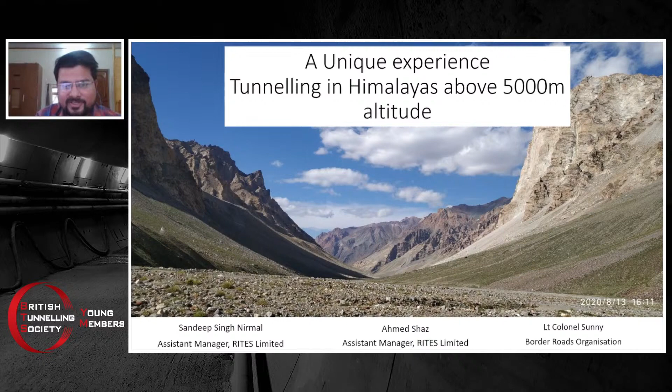Sandeep, can we move to the next slide? Sandeep, can we go to the next slide? Yeah Shaz, is this visible to you? Because we have moved to the next slide already. No, sorry, it's not visible to me. But is it from my end only, or can everybody see? Only I'm not able to see the next slide. I'll try to do that again, just give me a second. Yeah, I'll try to share it again. All right.

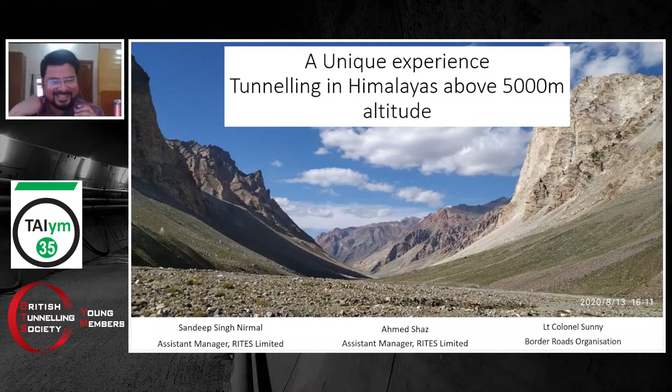Hello. Means only I have to start, or Colonel Sunny have to start again? Okay, now my voice is clear.

Hi everybody. This project, what Colonel Sunny had given a brief about before, is a 4 kilometer road project in the central Himalayas with twin tube tunnel, and there are cross passages connecting both the tubes. The altitude of the portal is around 4,800 meters, and the passes on which we were working in that area were around 5,100 to 5,300. Some of the tunnels we're working on are like the highest motorable road in the world, and we are making tunnels there. Coming back to this project, the height of the pass was 5061.

Okay, again something happened. Hello. I'm audible, but I'm not able to see the presentation. Sandeep, there's some issues from your side. Is it same for you, Divik? Let me share again.

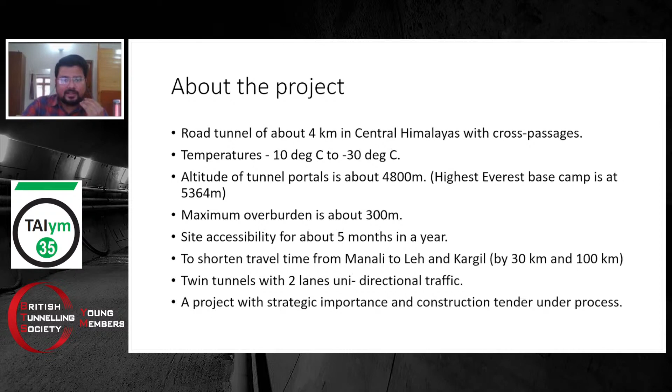300 meters, and the site accessibility is 3 to 4 months effectively. In that time you have to tackle a lot of difficulties, with frequent snowfall, rainfall, and sometimes cloudburst. The approach road leading to the tunnel site sometimes got washed away during that working period of 3.5 months, so a lot of challenges we face on a daily basis. This tunnel, once made, will shorten the distance from Manali to Leh by around 30 kilometers, and from Manali to Kargil by around 100 kilometers. It is a twin tube tunnel with unidirectional traffic. This is a project of high strategic importance, and the construction tender is under process. Can we go to the next slide?

To prepare the quality DPR, we did many pre-construction studies in the site area. These included traffic studies, and then alignment design was done. There were many options we figured out, and out of all the alignments, we selected the best possible one in that area, considering all the constraints and mandates. We procured high resolution satellite imagery, and after that topographic survey was carried out. For geological investigation, we did geological mapping. Our whole team of geologists, senior geologists, and everyone went through the alignment in the remotest possible area, even on maximum overburden, and they did a good job. After that, the boreholes were planned, and we carried out an extensive drilling program so that all the required boreholes could be completed in the limited time. We did more than sufficient drilling, working day and night in that area. Although it is very difficult to work at night, somehow we managed.

The geophysical survey was done by three methods. ERT and SRT were carried out physically on ground, and after that AEM survey was also carried out. AEM survey is basically airborne electromagnetic survey carried out through an antenna handled by a helicopter. We used a Chinook helicopter, and this antenna was taken along the alignment, and you can get as deep as 600 to 700 meters of geological data inside the ground. But the only constraint is you have to maintain the distance between the antenna and the ground at around 50 meters. If the distance between antenna and ground increases, the penetration depth will decrease accordingly.

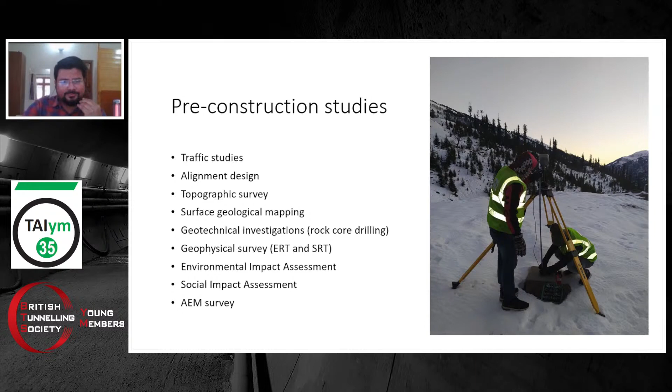Can we go to the another slide, Sandeep? After the extensive geological investigation in the area, we identified around 6 ground types consisting of quartzite, phyllitic quartzite, quartzitic phyllite, and based on these 6 ground types and considering the overburden, around 8 behavior types were concluded for the design. Correspondingly, the excavation and support classes are designed. Since it is still in tender process, I cannot go deep into the detailed aspect of each thing. This is just a broad overview of what we encountered. The L profile, as you can see in the presentation, shows some red lines. These are the shear zones encountered in the middle of the alignment, and we have proposed suitable measures that need to be taken during construction in that particular area. Can we go to the next slide?

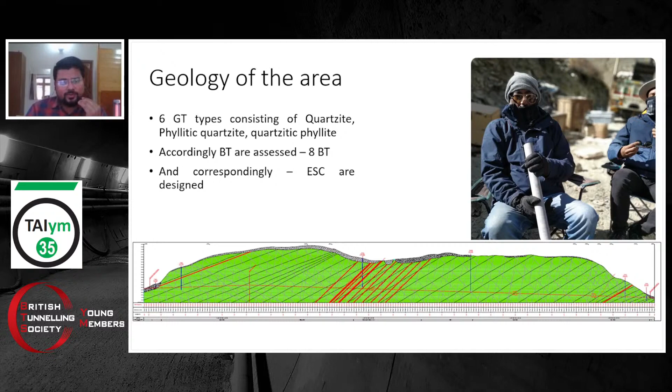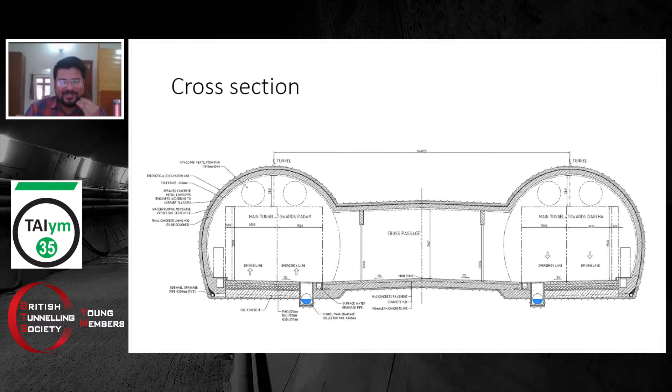So this is a cross section, a typical cross section of the twin tubes that are being connected with a cross passage. This is just a typical cross section, not much to say in this.

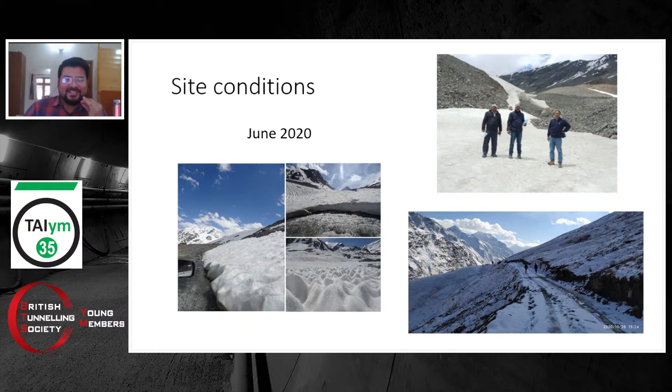It was a good experience. I'll talk down the line about the experience we had when we were there at the site for the first time. Now, working in that area for around 2.5 years, it's been almost 3 years since I was working there. Now the body is acclimatized, some better part, lot of hemoglobin.

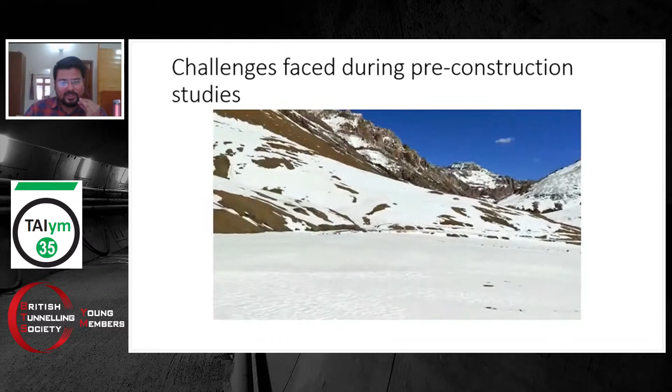Sandeep, can you just play this video? This is one of the site visits we had gone to. This is also in June, and you can imagine what type of cold and snow and difficult part of the world we are living in, we're working in. The road was not accessible, especially in that part. We had to trek to the site area just to get the location of the boreholes and portals and the alignment.

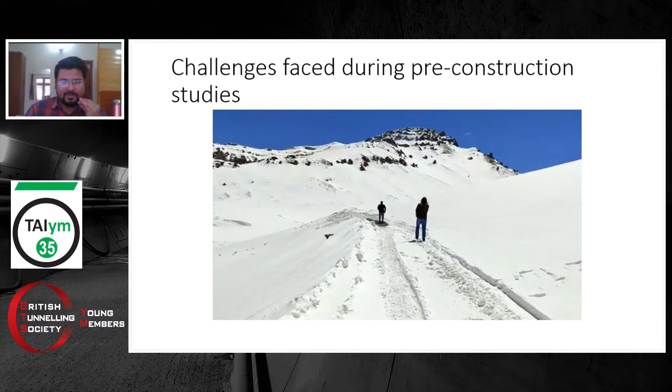So now, I just want to share some of the experiences we had faced while working in that area for more than 2 years. The working period is very limited, it is around 4 to 5 months.

Shinku La snow cover is high. In some of the other passes, snow cover is less, but temperature is very low. Winds are in biting condition, you cannot stand outside after 4:30. And since the altitude is very high, around 5,000 meters, you need to acclimatize.

The air pressure is very low in that area, so you cannot just come from the plane and stand in that area without getting acclimatized. It will just collapse you. In fact, many of our colleagues who hadn't gone through a complete acclimatization process came to the site and felt very unhealthy. We had to immediately provide them with oxygen cylinders, and some of them were immediately rushed to a safer place.

And there's frequent snowfall and rainfall. When I tell you only 4 months of working, that means the rest 8 months are totally packed. And in those 4 months also there are so many times you will face snowfall and rainfall. But since you have to complete the work, otherwise it's again after 8 months, you have to do anything to complete it, whether it's snowfall, rainfall, cloud burst, whatever. You have to just focus on the activities and how it will be completed in the limited time.

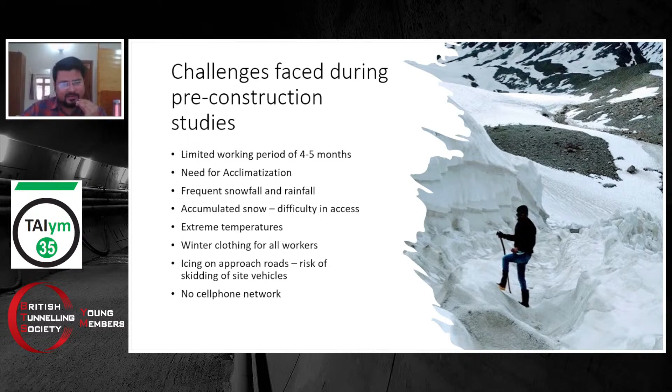Remoteness means you cannot see anything like 50 kilometers south, 50 kilometers north. Some yaks you can see, and even the yak will look at you, wondering who are these creatures coming into our area. Some wild horses you can expect too.

Apart from humans, everything is there, like some very endangered species, some wild goats, and you can even encounter a snow leopard. Especially at night, one of our drillers was sleeping in his tent and he encountered one. So the very next day we shifted everything to a safer place. This generally happens in winter when we are about to close the site, and all the tops of the mountains are snow-capped, so these wild animals come down to the valley for drinking water.

Considering all the remoteness, there is no logistic shop nearby. For some 50 kilometers you have to go to buy diesel. One petrol pump shows a sign: next petrol pump 375 kilometers ahead. So just imagine the remoteness — a lack of planning can lead to disaster because you cannot afford to lose time in this area.

Because once if you are not completed, then it's again after 8 months, and that is just too much time. So the planning part, especially completing all activities in a very limited time, is very important, and we did it — starting with site mobilization, then machine breakdowns, supply of logistics, circulation of information, uninterrupted supply of diesel, human resources — everything needed to be planned.

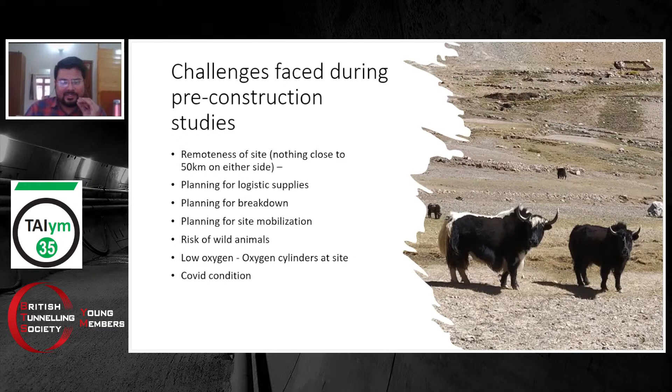Going to the next slide, these are the logistics issues we have faced.

Now coming to the technical challenges, the area was not accessible when the main approach road itself was under construction when we started working in that area. So to send our machine to a location good for drilling, many times we had to make approach roads, and these approach roads are sometimes as long as 3 or 4 kilometers for some projects.

In Shinku La, fortunately, not that much approach road was required, but if you accumulate all the approach roads, it was around more than a kilometer, or even more, that we had made just to drag our heavy machines and all the equipment to the drilling locations and start drilling at the right place.

So trace cut was difficult. You have to keep working, making up platforms, and these are time-taking, time-consuming activities. Many times your trace cuts, nicely built, after some snowfall or rainfall got washed away, and again you have to do rework in that area.

So rework is a very natural, very common thing. Everybody in the team is at peace with the rework in that area. Everybody knows rework is a very natural thing, you have to do it. Machine efficiency is also very important.

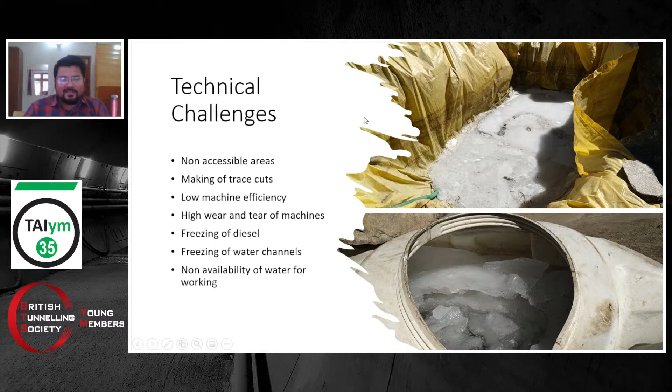Going to the next slide, these are some of the photographs of the site.

Many times your vehicle will not be able to reach the site location. Believe me, at a height of 5,000 meters altitude, you have to trek literally for kilometers - as much as 10 kilometers going and 10 kilometers coming back, crossing water streams with water as cold as ice. You cannot put your foot in that cold water for more than 30 seconds, but you have to because there's no other option. You have to get into it and then come out.

Then there's evacuation and mobilization. Sometimes mobilization is good because it happens when the snow is about to go, but demobilization itself is a big challenge because you have to finish the work and ensure all your machineries, equipment, and resources are safely back to a comparatively lower elevation before the area gets packed with snow.

Colonel Sunny can understand the difficulty of this area. Some people got stuck, and Colonel Sunny and his team helped us a lot in getting people out of that very difficult situation, with the help of the whole administration. We are totally obliged to them. It was around 2 in the night.

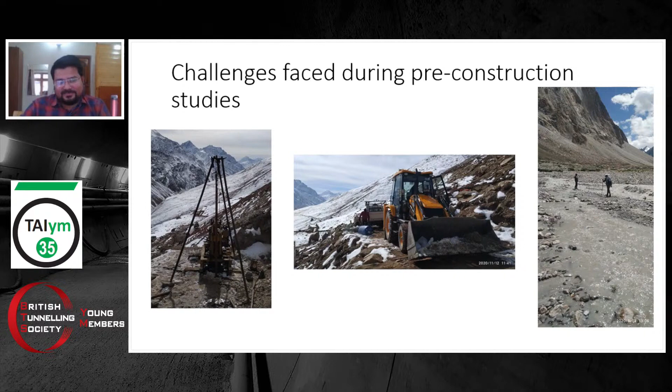Going to the next slide, these are some pictures from when this cloud burst happened. You can imagine this type of scenario.

This is the main road, the main highway on which this JCB is standing. Just imagine if the condition of the highway is like that, what will happen to our trace cut - that means at time t equals zero it's in perfect condition. Just imagine when these types of things are happening, how difficult it is for the site team to move to the site and carry out their regular activities.

Many times you go to the site after a whole night of rain and snowfall, and most of the equipment gets submerged in snow. Then you have to identify where your machine is. You either wait for the sun to come up, or you physically remove all the snow and then start the activities again.

One of the photos at night shows our demobilization process going on. We were informed by the meteorological department that snowfall would happen at the site the next day. Snowfall gives you three warnings - one in September or October, the second mid-October, and the third around the start of November. After the third warning, the site gets totally closed, and it won't open again for 7-8 months.

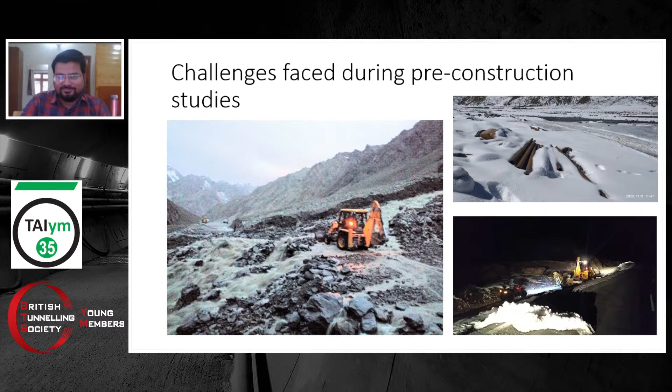Some of the pics now show our tents at the site location, some live drilling happening on site, and the prevailing site conditions. For you it might be difficult, but when you are working on a daily basis in that area, it becomes the new normal. You feel like, today you can see a bit of clear sky, so everything is good, because seeing clear sky, especially in this Shinku La type of area, is a rare phenomenon. There are always clouds, either there or seeming to come.

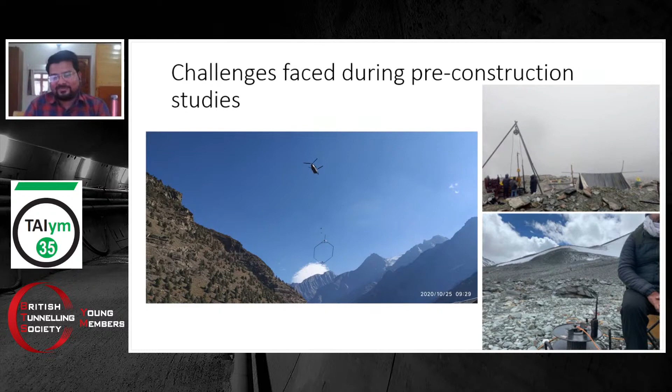So, going to the next slide.

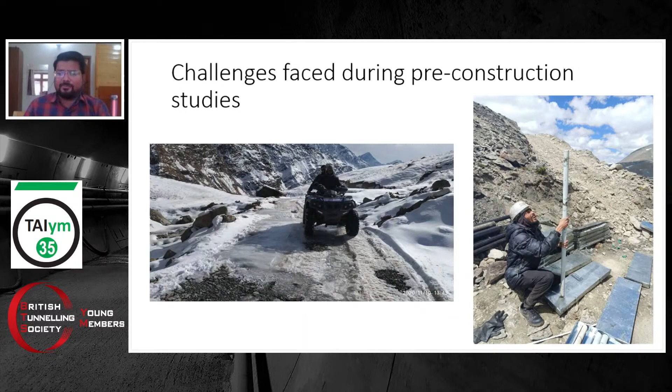So now I will give the presentation to Sandeep, and he will take you forward with some challenges expected during construction. Thank you.

Thank you, Shaz. Thank you for this wonderful experience that you have shared, what you went through by being there on site, doing all these activities, and providing the workers a very good environment to work in, in such a difficult situation where you are really cut off from the whole world.

Sandeep, you might like to check your mic. You're on mute, if I'm not wrong. I'm fine, I'm not mute. Am I audible to you? Yeah, I can. Fine, yeah, that's perfectly fine. Okay, fine. Is it fine? Shall I go ahead? Yeah, okay.

I was just thanking Shaz for managing all the pre-construction studies and doing all the work on the site to gather all the information about this project.

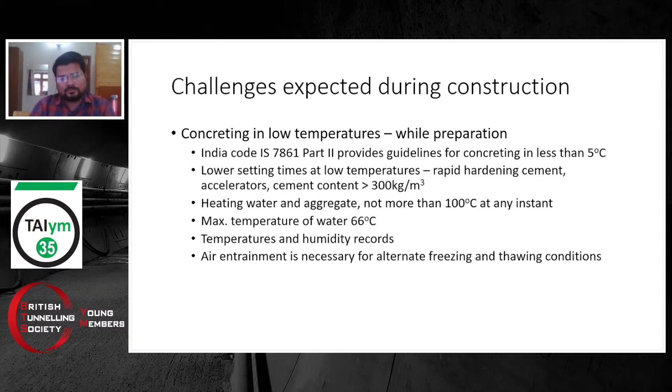And to utilize all the barren space at the moment, very beautiful space to be honest, which has huge potential to develop as a big tourism industry.

These tunnels are in extreme conditions and need specific new ideas for construction. I'll bring out a few of the important aspects from this project. Unfortunately, I won't have time to discuss everything, but one of the things I'd like to discuss is concreting in low temperatures.

When the design was going on, the very first question was how the concrete will behave in temperatures like -20, -30 degrees. The planning for this project is such that we have to work 12 months a year. So even if it is -20 or -30 degrees, snowing for a long time with a snow cover of about 5 to 7 or 10 meters, we still have to work.

So to enable the contractor, the client, and the designers to work on this project, which is on a very strict timeline, we had to include and consider a few technical aspects so that we can foresee these challenges and find ways to go forward.

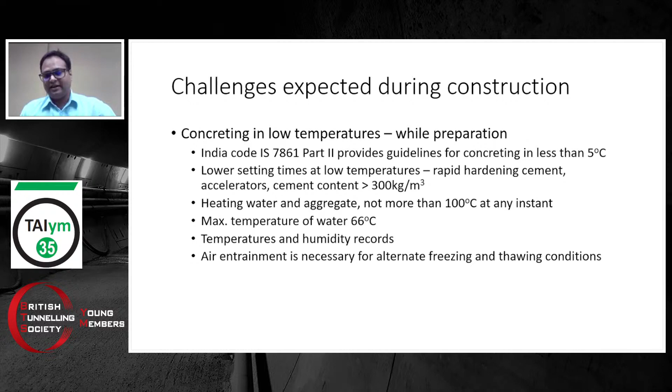If I go to the next slide, I can show graphs of what happens when concrete goes through cycles of freezing and thawing. You can see that as the freeze-thaw cycles increase, the compressive strength can fall to up to 1/8 of what it should achieve, elasticity falls very low, and the concrete can become brittle quite easily and produce cracks.

So what happens is we add air entrained agents, so that after adding them, the concrete has some scope for recovering from those contractions and still maintain its own properties.

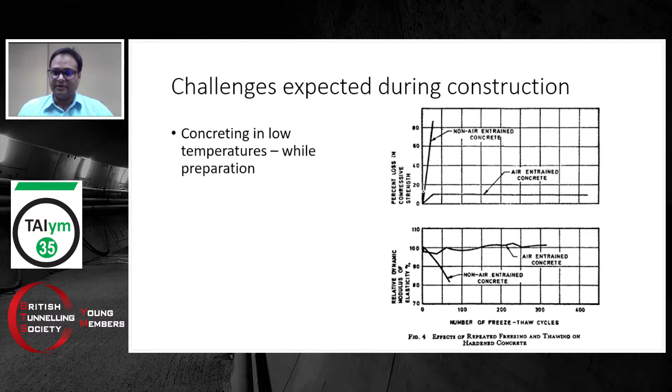Then, not just production and the components we add, but transportation of concrete from the batching plant to the site is also an issue. So as soon as the concrete is ready, we need to put it into vehicles, apply insulation against those surfaces, and transport it as soon as possible.

So we have to make sure that the concrete shall have the temperature of 10 degrees when it reaches the site of pouring, and the temperature shall not fall below 5 degrees at any cost. Then the concrete mixture trucks that are taking the concrete shall be continuously in motion, mixing continuously, and the vehicle should not stop in open or cold temperatures.

It should go into the tunnel, and when the temperatures are fine, then we have some time to halt them or stay inside the tunnel. So what we have planned is we have cross passages, so we'll make some space for the vehicles to stand in the tunnel by the time there are other movements going on parallelly for construction. So we need continuous monitoring, a continuous supply chain maintained within a frame of time, so that there is no excess and no shortage at the same time for the whole project.

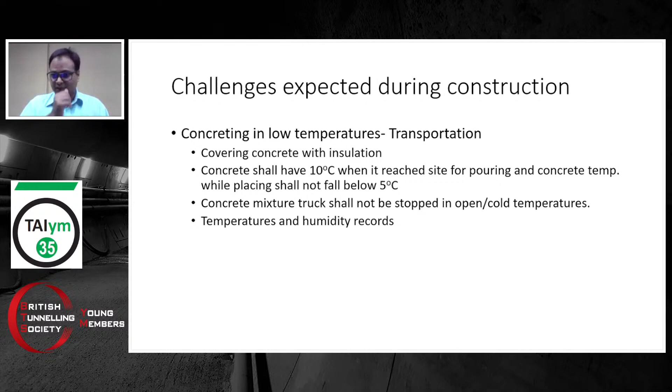Then again, we have to make sure that we take all the temperature and humidity status and make a record of them while we are transporting it, to make a decision whether we need to use the concrete or not.

So we have to make sure that the strength of the concrete is not compromised. And if the concrete is continuously at low temperatures for the curing period, if we leave the concrete at -7 degrees temperature, then the strength of the concrete goes down to 15% of what it should achieve.

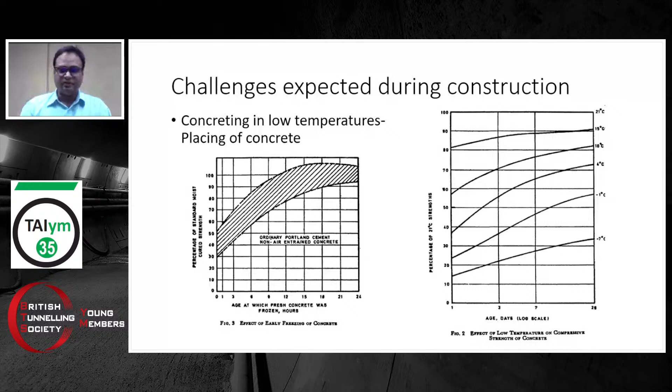So we have to make sure that it's not only production of the concrete or transportation of the concrete, but during placing of the concrete, it is equally important that we place it and maintain it for the curing period at a particular temperature.

So the code provides guidelines regarding that as well. It says that we should put the concrete as quickly as possible, and insulation should be provided against the concrete surface, against the shutters, for it to retain the moisture as well as temperature for as long as possible.

And since the gain in concrete strength is slower, we have to make sure that the formwork is longer in position. We have to find out with the mix designs and trials how long they should be. We have to put the formwork a little bit longer so that it gains strength while we move it. We have to cover the concrete with insulation as soon as the formwork is moved.

Concrete's temperature, as I have already shared, shall be more than 5 degrees while placing, and it shall be maintained at least for 7 days, preferably for 28 days, but at least for 7 to 8 days at that temperature. If required, if the temperature suddenly falls, or if we are near the tunnel openings near the surface, then we have to go with steam heating to keep it at the temperature that we need.

Although the construction is planned to begin in the summer season, so during summers these problems may not be as severe as they will be in winters. So the initial portal locations will be cast in place during the summer itself. But all these factors have to be built in for anything which comes up in future.

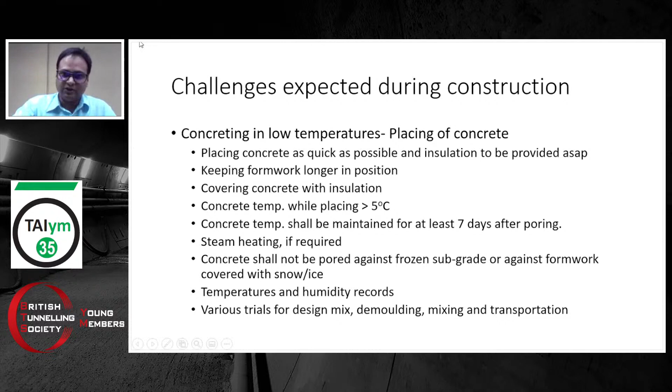And the contractor has to do various trial mixes for finding out the time of demolding, when to do the mixing, what temperatures to do that at, how to put it into transportation, what would be the cycle time, how the mixers will move, and how the concrete will be placed.

Then for the shotcreting, there are many more things that we need to find out during those trial mixes when the contractor is on site. We need to see how the setting time of concrete changes in those temperatures, how is the bonding with the cold surface, what's the rebound, what's the early setting strength.

And we have also kept the option of dry shotcreting. So in case we cannot produce wet shotcrete at some time, what we can do is we can store the aggregate, water and cement inside the tunnel in the warmer area where the temperature is relatively higher than outside, and then we can do a dry shotcrete where everything is mixed in the nozzle and is put on the surface itself.

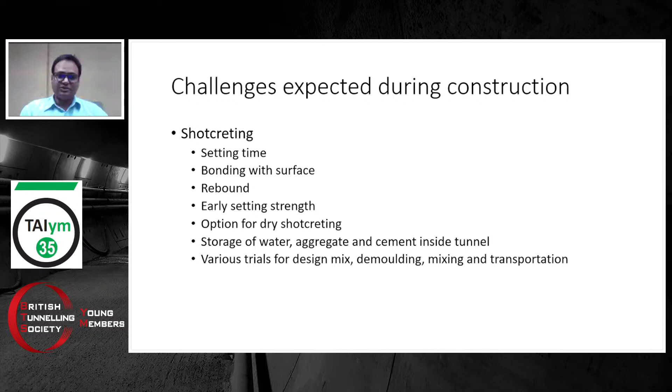The contractor has to do various mix designs for these shotcretes for sure. It's not only concrete - in those temperatures, maintaining almost everything is very difficult. But apart from concrete, I think water also plays a very huge role in this project.

What we have seen from experience is that in this region, if there is water in the pipe, it just expands and breaks the pipe. So it is important that insulation against the pipes shall be provided. Heating systems against the pipe shall be provided with running water so that it doesn't freeze. Vacuum suction facilities should be there so that water and waste from the pipes can be sucked off so that it does not have the scope of expansion and further degradation and breaking of those pipes and storage drains.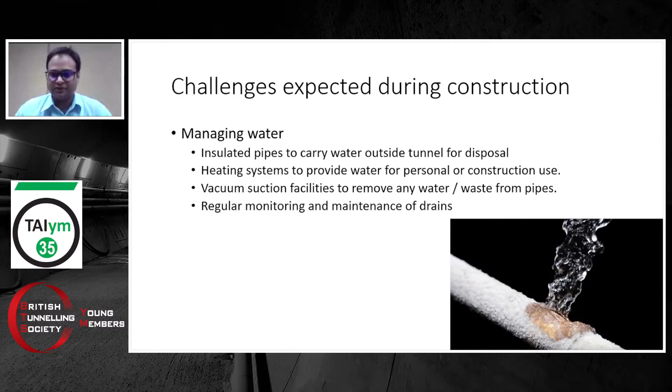We need to do regular monitoring and maintenance of those drains so that the water doesn't freeze. Then we need to manage the waste as well, as most of the area during winters is covered with snow. So if we just dump everything on the snow, when the snow melts, everything will flush down the valley and pollute the environment there, producing issues like groundwater contamination and surface flow contamination. So what we have done is we have planned...

...a disposal site where we will put all the muck and all the water which is coming, and dump it there. During winters, we'll make sure it is covered so it doesn't get filled with snow, and the dumping is carried on until winters, which is a difficult time. When the winters are over, we can rethink how to manage it further and prepare for the next season again. So it has to be a continuous thing to go with.

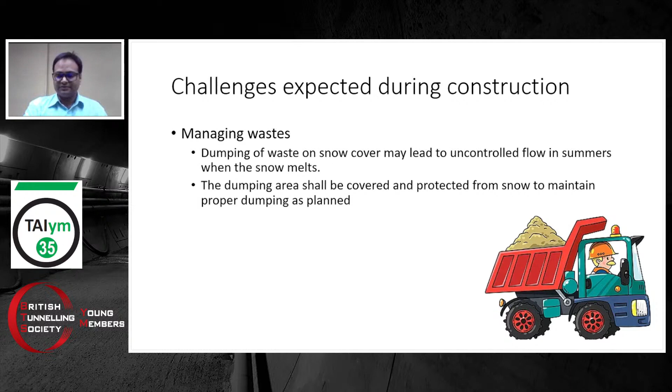Then again, ventilation. If we talk about ventilation during construction, so if you think about tunneling and sucking external air and providing it to the face of the tunnel, that is not a very good option, because that air outside itself is very cold. So if you put the cold air in, the shotcrete doesn't gain strength, the concrete doesn't gain strength, and the people who are working in the tunnel will just freeze, and it will be very difficult for them to work in that region.

So it has to be made sure that we need some heating agents into the ventilation system, so that the air which enters shall be acceptable technically, as well as providing a good environment and weather conditions inside for the people working there. What we can also do is close the portal of the tunnel temporarily with air barriers, so that the transfer of air is minimum from the face of the tunnel. All these aspects have to be taken into account.

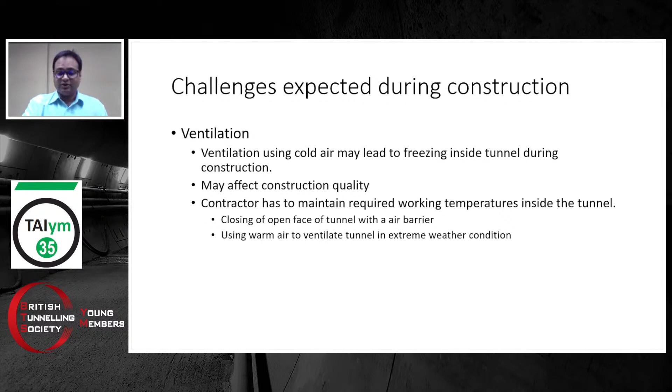As Ahmed Shaz has already told, the experience we have had with the pre-construction studies is that the efficiency of all machines reduces as we go higher on the altitude. As we go higher, the air pressure reduces, and with reduction in air pressure, the air density reduces, which means for every amount of air that the engine brings in for combustion, less oxygen is coming in, and hence proper combustion is not happening. So what we observed is that we faced about 30 to 40% reduction in the efficiency of machines while working there.

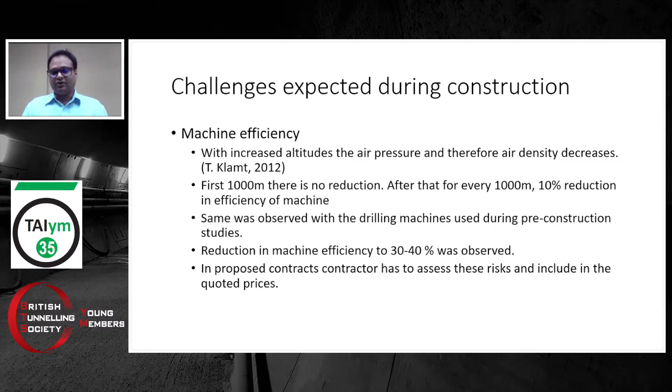Generally, for the first 1,000 meters above mean sea level, we don't see any reduction in the efficiency of the machines, but every next 1,000 meters we see about 10% reduction. Since we are working at around 4,500 to 5,000 meters, we can expect it to be about 40 to 50%. We have already seen it was about 30 to 40% for us. So more wear and tear of machines, less fuel efficiency, and less efficiency of machines has been taken into account. The contractor has to, since this project is going to contractor's bidding for construction, take all these risks into account and quote a price accordingly.

We have to maintain few supplies, whatever we have to use at the site, since roads are almost closed for 6 months. It's very difficult to maintain transportation to go to the site and come back. That's why we need to store important stuff on site itself, such as cement, steel, aggregate, water, explosives, food for the people, diesel, clothing, so much stuff. Everything has to be planned, and we have to assume that all the workers there have to live there. There should be facilities for that as well.

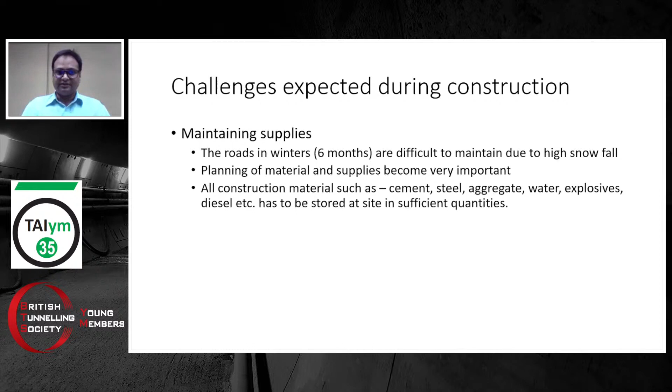I'll not go too much into the design, because our presentation was about the challenges we face uniquely working at those heights. So I'll just briefly speak about the primary and secondary supports we are proposing in the tunnel. We have a combination of shotcrete with rock bolts, wire mesh, lattice girders, steel fibers, and these vary as different support classes as we go through different geology.

And in secondary lining, we are using unreinforced concrete with microfibers, and sometimes a combination of microfibers with steel fibers. Where we have encountered very poor geology, we are using conventional reinforcement bars and steel fibers with the concrete.

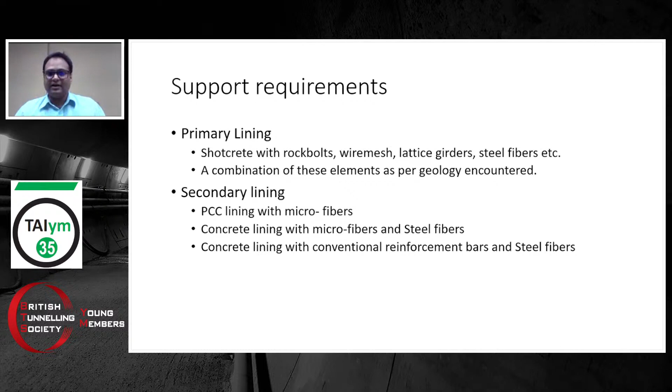With this, I would like to go to Colonel Sunny, Lieutenant Colonel Sunny, to explain what lies ahead for the project. Since he is the client, he would be looking after this project for a longer period of time than us, and he would be the best person to take over from me. Lieutenant Colonel Sunny, please, go ahead. Thank you, Sandeep. Now I'll take on.

Schedule by working throughout the year. Now what is happening is if there is any delay at a particular stretch, that would have a cascading effect on the entire project, because already we are falling short of time. We don't have any time to cope up, so 4 to 5 months we are already short. This is very particular in any project at a high altitude, snowbound area, where the working season is very less. To avoid any fatal lapse of time, it is much more relevant to stick to the time schedule.

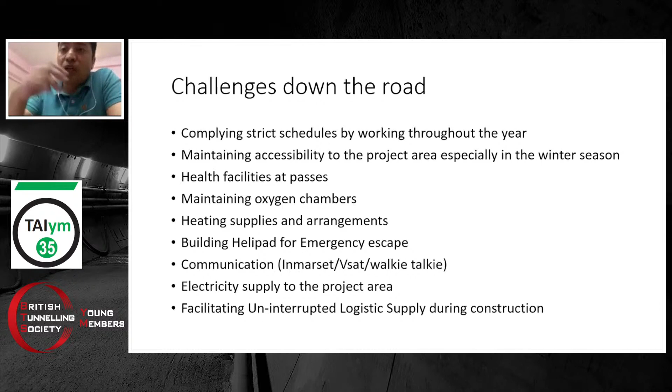Then training for evacuation is very important, because whatever set of people or specialists are on ground, they need to be well versed with the situation or eventualities which would arise in any case, so that they are anytime ready to attend to all these issues and can bring out the help within themselves.

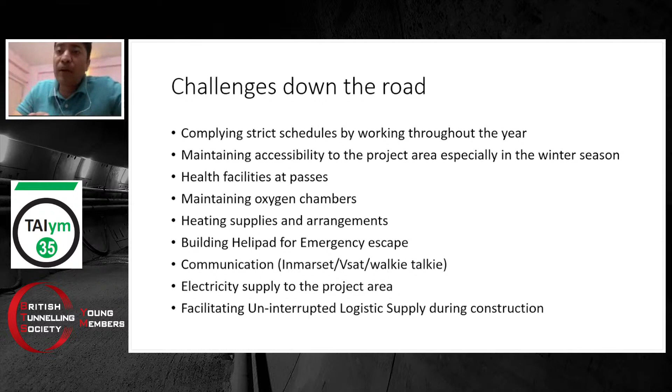Then the last point here is specialized clothing. We need to work in a high altitude area. Clothing is very important because unless people are comfortable, they won't bring maximum efficiency. So it becomes very important to provide them the correct set of clothing and equipment to work in a high altitude area where we have a lot of snow and less oxygen around, plus the connectivity to the mainland is difficult. So these things are very important.

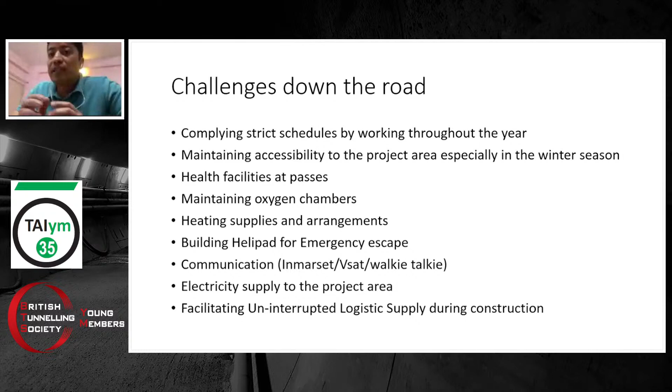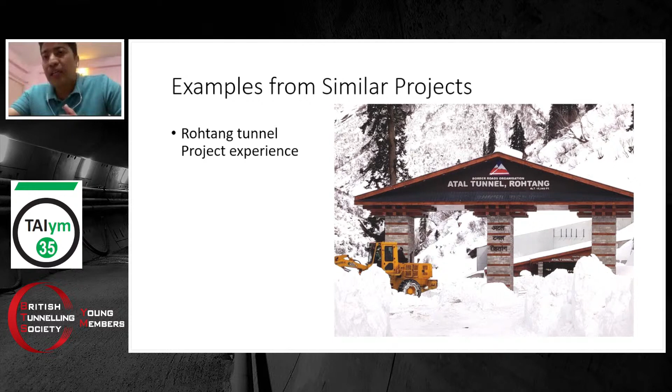As Border Road Organization is also taking care of the Atal Tunnel project, which is the highest tunnel to be built at a height of 10,000 feet, and it is the longest tunnel at that particular height. I'll bring down a few points from the project and the experiences I've faced, because it itself is in a kind of high altitude area where we had a lot of issues as far as the tunnel is concerned.

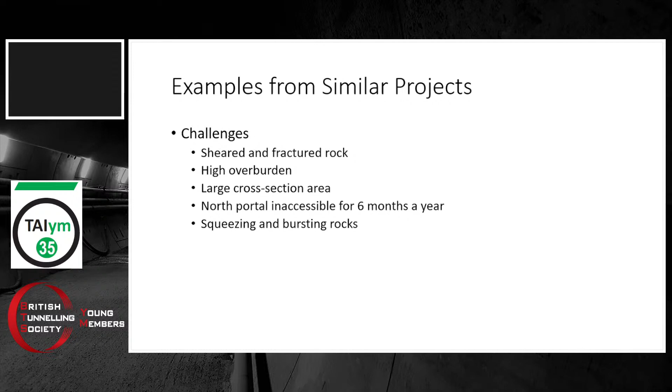Since it is in the East Pir Panjal ranges of the Himalayas, when construction was on, the sheared and fractured rock was one of the major impediments. Specialized focus had to be laid on these issues to address these particular areas.

We had an issue of high overburden during this project, where approximately 780 meters from the south portal needed a dedicated design effort. Then there was the large cross section area, and the north portal being inaccessible for 6 months a year. This was the most challenging part because there were 2 attack points, and one of them was almost defunct in winters, so we were only able to address the tunnel from one point, the south portal.

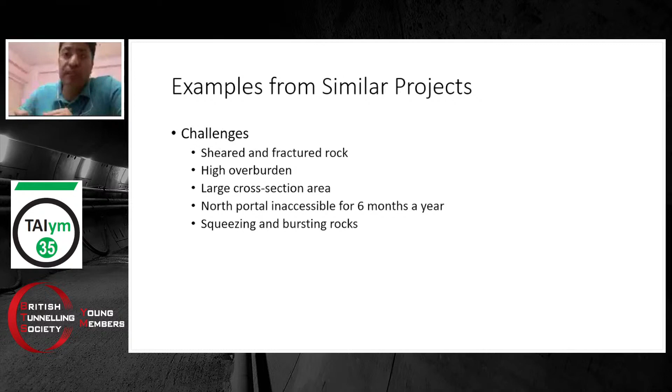Then there was squeezing happening inside throughout the tunnel, and one rock burst incident happened, but fortunately there was no fatal incident as far as the rock burst is concerned.

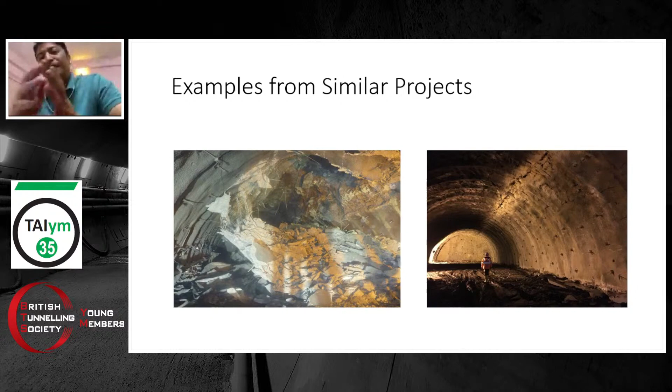There was a particular case of the Seri Nallah fault zone addressed during construction of the Rohtang Tunnel. When the excavation phase reached this fault zone, around 2.5 kilometers from the south portal, suddenly a lot of muck and water started gushing out of the main face at a rate of 8,000 liters per minute. The entire work was halted, and we had absolutely no idea what to do.

These were the kind of unforeseen events faced during the construction process. Eventually, a lot of study went in, along with a lot of effort in terms of manpower and resources. Finally we were able to overcome it, but it extended the construction period to a very large extent, which in fact affected the entire project.

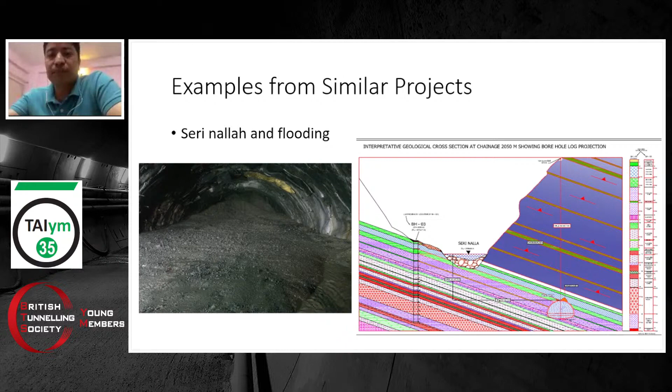As we all know, with the Rohtang Tunnel portals coming up, the area also required stabilization of both the south and the north portal.

With the tunnel coming up and the challenges faced, we are moving ahead with the Shinku La Tunnel project, gearing ourselves for the next level. Here the height addressed was 3,000 meters, which gave us a stint of what working in a high altitude area is all about. Now with the Shinku La Tunnel project we are working at a level of 4,500 to 5,500 meters, which is the extreme of any high altitude area, with a lot of snow and very minimum working period available throughout the year. So it will be more challenging, and the level of difficulty would increase exponentially.

So we are planning in such a manner, and as a team we are giving dedicated effort and time to all these challenges, devising ways and means to streamline each and every factor, so that efficiency is maximum and together we are able to meet the targets in time.